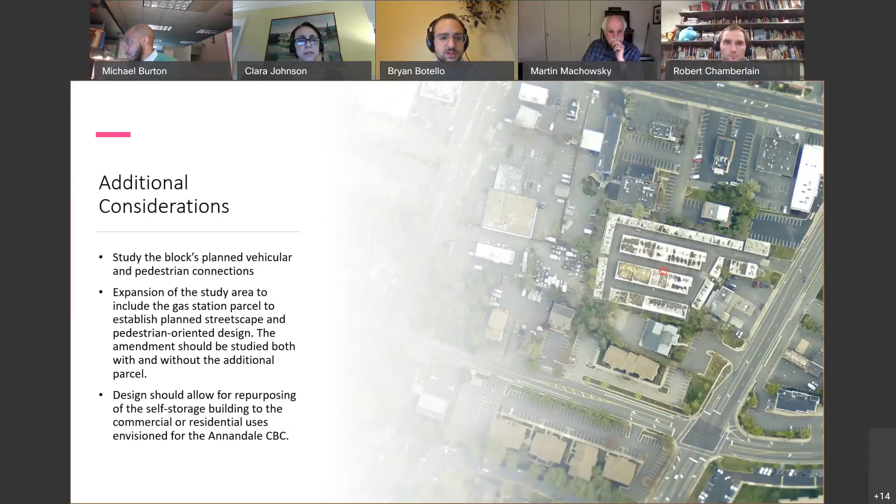So why would a plan amendment be needed to pursue this concept of an approximately 153,000 square foot storage facility? It's an issue of intensity and the mix of uses for the most part. Under the current zoning ordinance, the property owner would be allowed to build a new storage facility at this site, although it would be capped at a lower intensity, just about 40,000 square feet. But to develop at a higher intensity, the property would need to be rezoned, and therefore would need the support of comprehensive plan guidance.

The issue here is that the comprehensive plan and the zoning ordinance either discourage or don't allow storage facilities as a primary use at these higher intensities. There's also a question of the feasibility of the repurposing guidance. Our consideration up to this point has been that the same kind of barrier to having a single use at a high intensity exists with pursuing this repurposing guidance. It doesn't provide any additional uses and doesn't address the issue of only having a single use. We'll get into that a little more later.

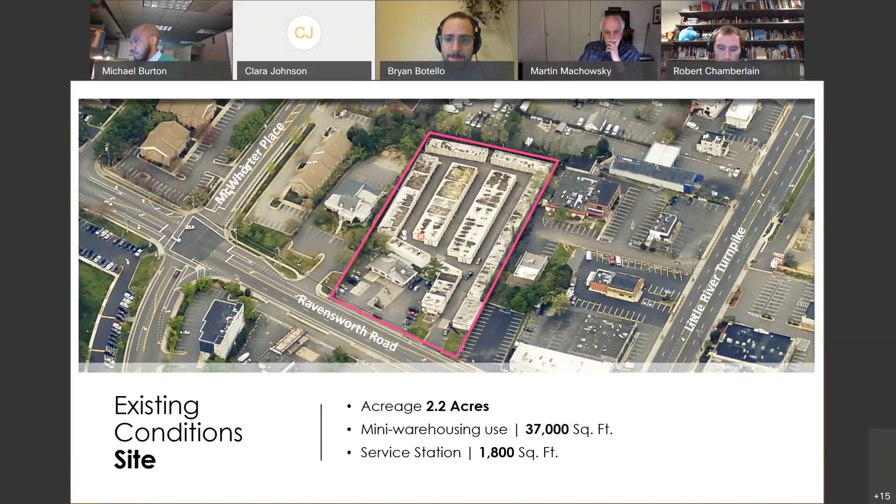Here it is, located in the context of the surrounding blocks. Behind the study area is the Messiah Presbyterian Church, and otherwise on the block it's surrounded by low-rise commercial development. At the very bottom left, at the intersection of Markham Street and McWhorter Place, that intersection is planned to be reconfigured, cutting out a section of the parcel at the very southwest corner of the block. The remaining land where you see the trees is planned for a new park. Immediately to the west and southwest of that intersection, townhomes have been approved for development.

The last thing I'll mention regarding existing conditions is that there is another existing public storage nearby, about 400 feet to the east of this one on John Marr Drive.

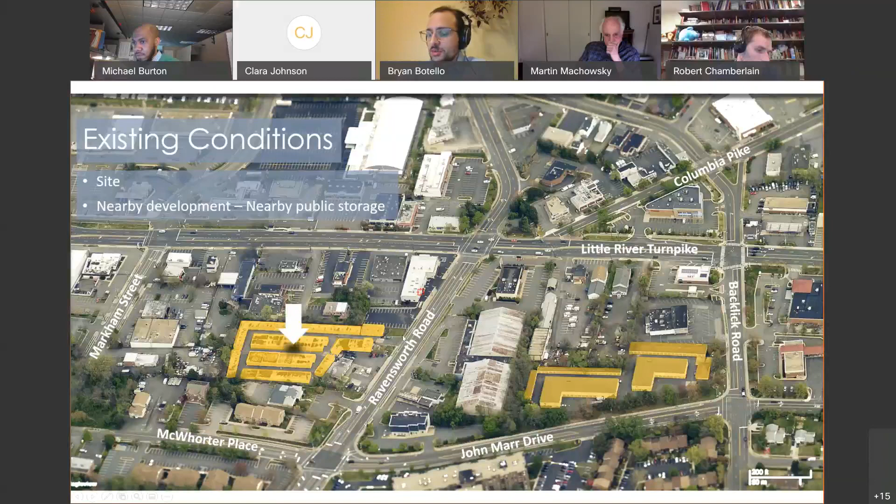Now that we've covered the scope of the planning study and the existing conditions, I'll summarize some of our considerations for this plan amendment study. Our evaluation is guided by two things. First is the concept's conformance with the existing comprehensive plan and the design guidelines.

Now, obviously this is a proposal for a plan amendment, so why should you care what's currently in the plan? Well, let's think back to last week. Remember there are different layers to the plan, and each layer is informed by the layer above it. So while we're considering a plan amendment for these particular parcels, what occurs here should conform to the Annandale CBC plan. That's really important to us. The Annandale community came together and produced this vision for how they'd like to see Annandale transform as a community business center, and we want to make sure that if the plan is amended, it stays true to that vision for a walkable and active community.

The second part of our evaluation is an assessment of impacts. For this plan amendment, our initial assumption had been that the impact assessment would be relatively simple, which is one of the reasons it was placed on the expedited track.

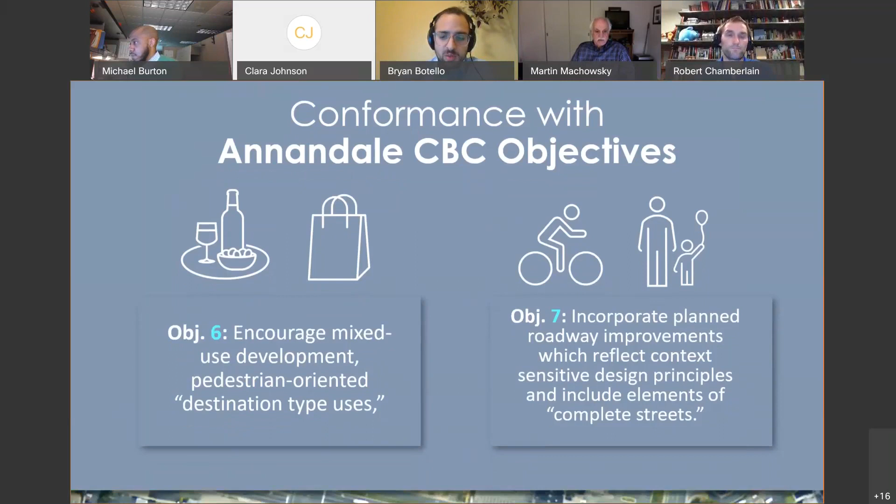These objectives should be achieved through the guidance found throughout the rest of the Annandale plan, some of which you'll remember from last time, and some of which we're going to dive into a little more detail on. So part of the guidance throughout the entire CBC relates to parcel consolidation.

The plan states that parcel consolidation is highly encouraged, again throughout the entire CBC, as a way to achieve the planning objectives. Any consolidation should be logical and of sufficient size to allow projects to function in a well-designed and efficient manner and address transportation needs, particularly access. And importantly, any unconsolidated parcels should be able to redevelop in conformance with the plan. That's an important consideration I want to stress to you all.

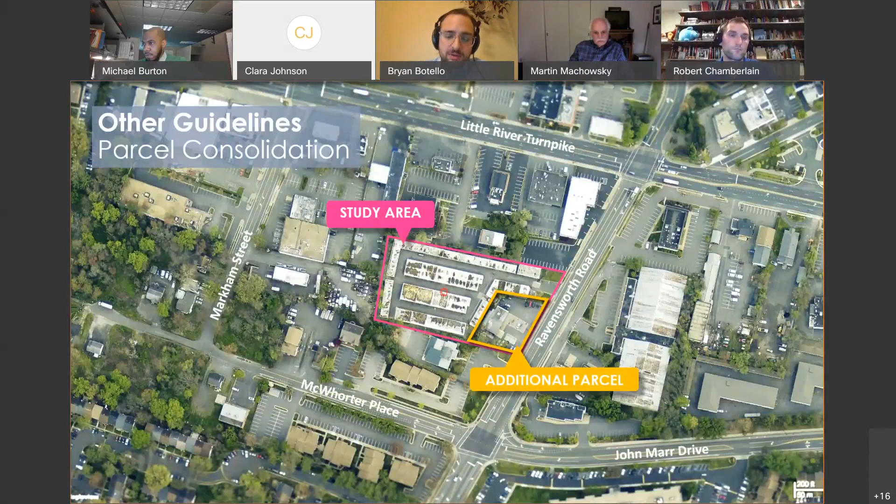Would the exclusion of the service station property from this planning effort prevent that property from achieving the goals of the plan on its own if it redeveloped at a later date? And does the idea that this plan amendment contemplates set a pattern that the rest of the block then has to conform to?

As we covered last week, Annandale's form-based plan contains guidance for achieving those objectives that I mentioned a moment ago. The form-based plan contains four elements: a maximum recommended building height, building typology, recommendations on general and specific land uses, and urban design guidelines.

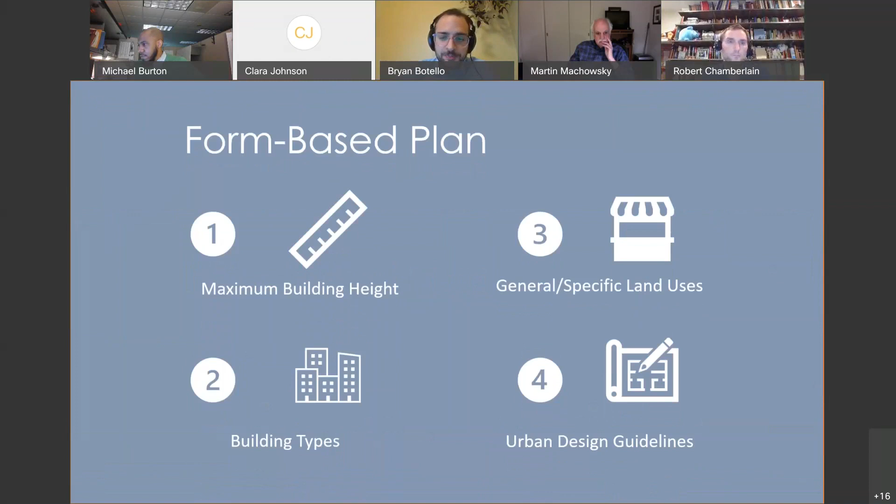So we don't have to spend a lot of time on this. I would just note for your information that the buildings are envisioned to be highest in general in the center of the CBC, and then they tend down in height towards the neighboring residential communities.

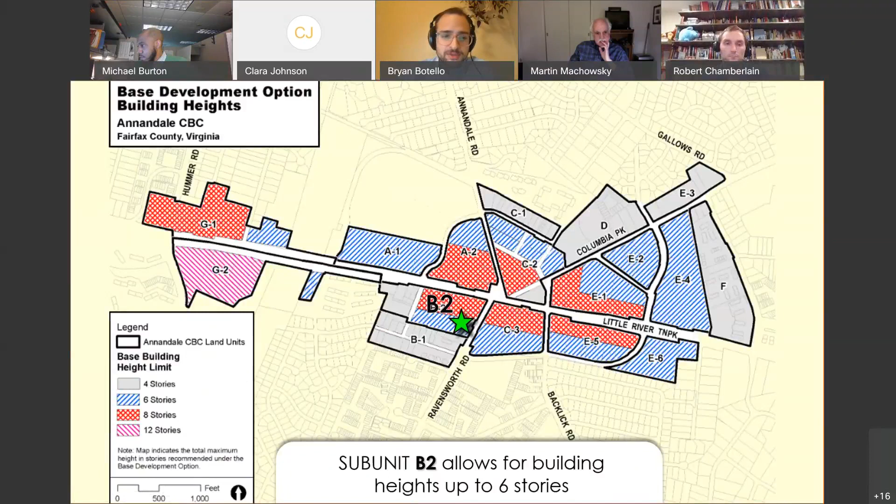And then again, you're all familiar with this graphic from last week. As you saw from the previous slide, this study area is planned for buildings up to 6 stories in height, which falls into the mid-rise commercial mixed use category seen in the middle here.

There's a brief description here, which states that these are medium scale buildings with single or multiple users. They typically have surface parking behind the building or some limited garage parking, which may be in a separate structure. And it also notes that some consolidation may be needed for buildings of this scale.

Finally, on the far right, we have the design standards, which state that buildings should be oriented toward the street, that the main entrance should face the street, and that the ground floor should be commercial use or live work. And once again, the authorized plan amendment does not meet these goals. It does not contemplate ground floor commercial or live work uses, and without consolidating, the building does not face the street.

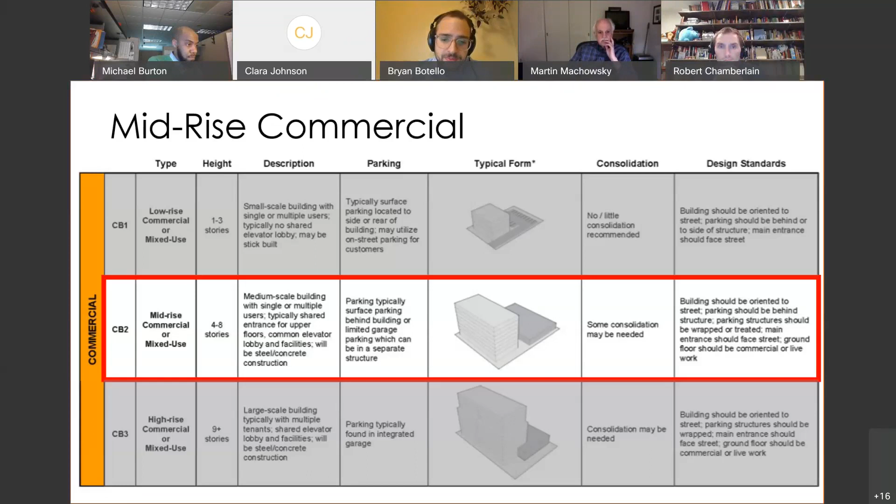And then again, the third part of the form-based plan is the land use guidance. As I mentioned last week, throughout the entire CBC, storage uses are specifically discouraged by the plan. However, it does leave an opening for their development. It states that if they are considered, they should be a component of a mixed-use development and not the primary use. The reason behind that is that storage facilities, as I mentioned previously, are considered an industrial, auto-oriented use that's generally incompatible with the vision for a lively, pedestrian-oriented Annandale.

So now we have the specific recommendations for subunit B2. You can see the major recommendations here on the right, but I will summarize them for you. It's planned for commercial or mixed-use development, a point I think I've already covered pretty thoroughly for the rest of the CBC. New streets and pedestrian corridors should be utilized to create separate blocks within the subunit.

My colleague Farouk will address that in more detail a little later. Communal surface or structured parking should be considered to address parking needs, and parcel consolidation for redevelopment is highly recommended. Another point I've already covered, but as you can see again from this parcel map, without consolidation, constructing a building oriented towards the road and providing the streetscape expected in Annandale is difficult, and it may present problems for redevelopment of the service station as well, as redevelopment for it may be envisioned later down the road.

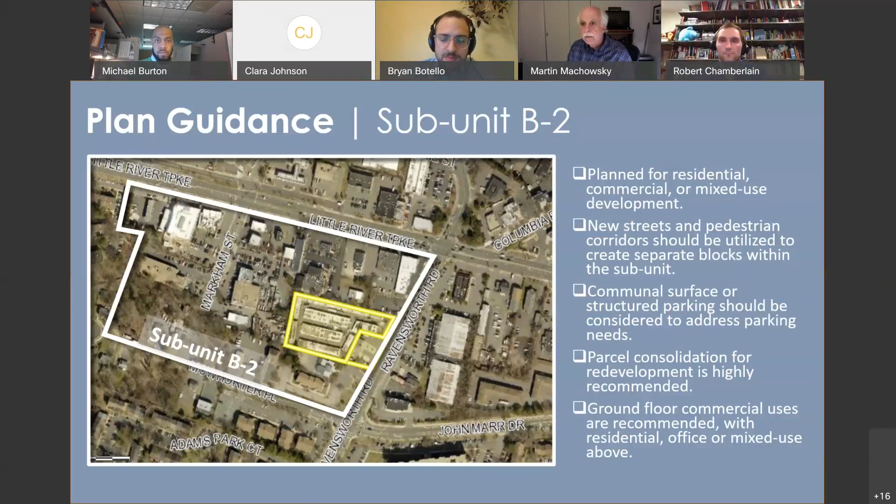And with that, I will turn it over to my colleague Laura Baker from the Community Revitalization section to talk about the urban design guidelines and how we're thinking about them in relation to this idea of a new expanded storage facility.

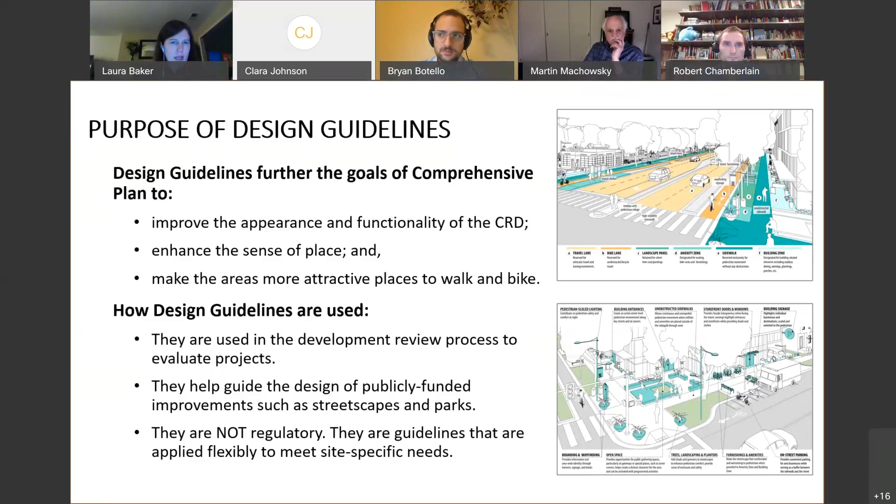Thank you. In Annandale, or is it now turned over to me? Sorry. No, I've got it. Should be on the next slide now.

Okay, cool. Thank you. In Annandale, we've had urban design guidelines that were created after the comprehensive plan vision was updated in 2010. In the county, the way we handle urban design guidance is broken into 2 volumes. Volume 1 applies to all revitalization areas and districts in the county, of which Annandale is one. Volume 1 really touches on broader urban design things like streetscape design, proper intersection design, landscaping, building placement, things that could be applicable no matter what commercial revitalization district or area you're in. We also have volume 2, which is more district specific. In 2011, design guidance was created for Annandale, which has been in use since that time.

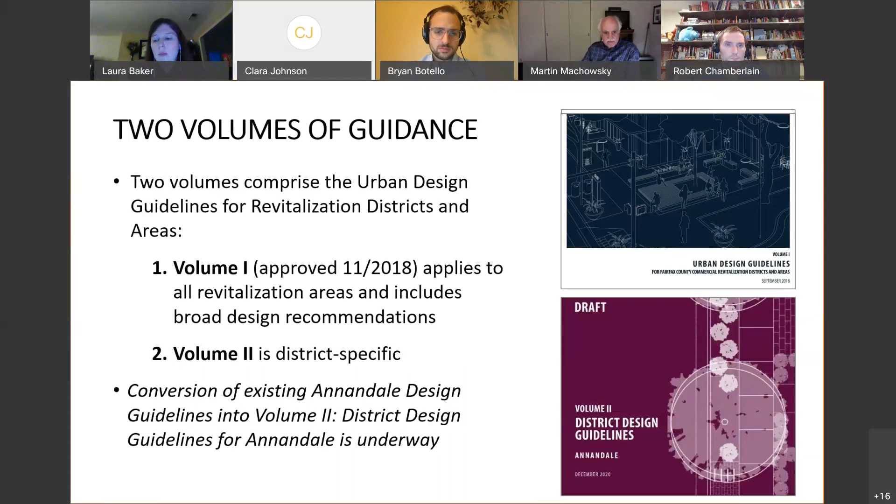Most recently, within the last couple of months, though it's been longer than that, we went out to the community to try to gather some feedback on an update to the Annandale district specific guidance. Volume 2 typically provides some of those more character defining aspects of a place, like elements related to furniture or what the streetscape's going to look like, or things specific to a place, which tell you that you're in Annandale versus that you're in Richmond Highway. So we've been working on that for the last couple of months and have been converting and updating that 2011 guidance to these updated standards.

Touching on the public realm aspect, we are always looking for projects to achieve that future vision for the streetscape, right, anything between the building and its relationship with the street to the travel lanes. So you can see here on the left, Ravensworth Road as it exists today — obviously not a whole lot of space for people to enjoy it. With the vision for Annandale in the future, we're looking to transform it.

We're looking to have a building zone directly adjacent to the building, a sidewalk so people can move through the area, a landscape panel with street trees, landscaping, and amenity zones with elements like furniture, lighting, benches, and trash cans. And then of course you have the roadway, which transportation will talk about more. This is an extremely important aspect.

One of the challenges with the proposal, particularly if it's standalone within just one parcel versus both parcels, is that the ability to achieve that vision is significantly constrained by the existing frontage that the main property has.

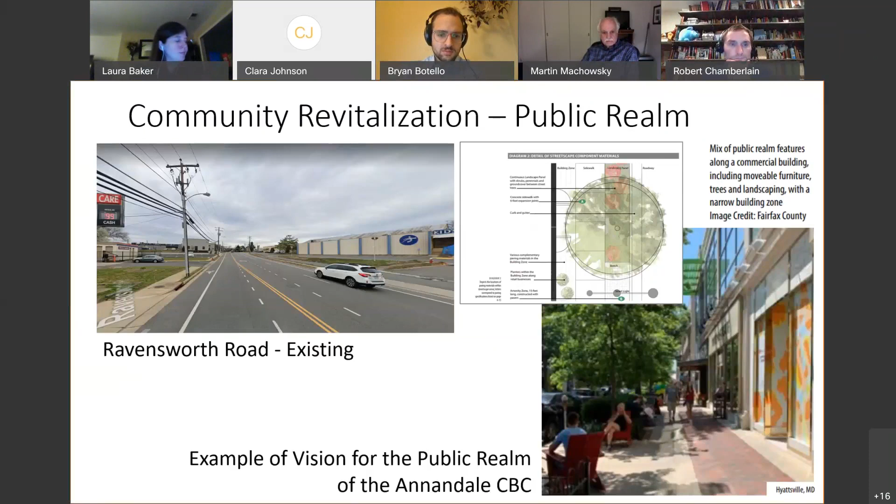Other things that are really important when we look at urban design are all the architecture elements: massing, modulation, fenestration, articulation — things that really matter to how a building looks, how it feels, and how it establishes a relationship not only with the street but with its neighbors. Considering the new height of this building and its visibility, these details are going to be really important since it would be a new development. Given the use being proposed, we're going to be very interested in things like window treatments and screening of equipment and things like that.

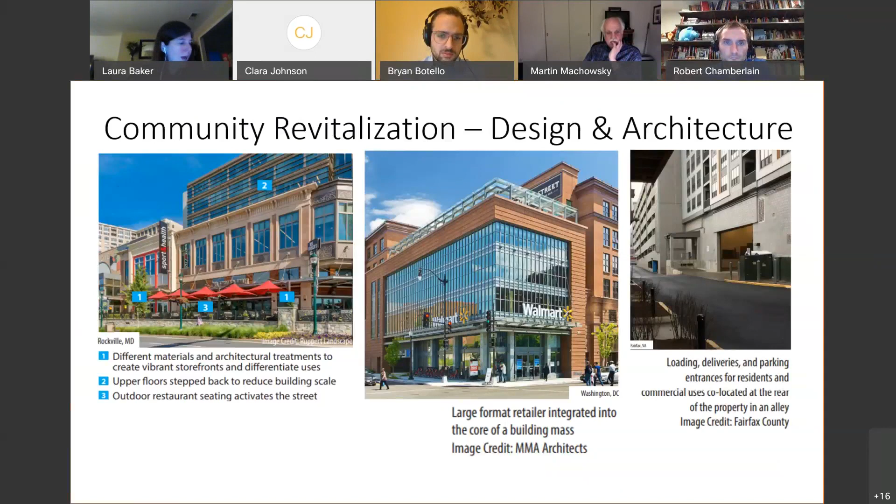Final slide, if you don't mind, Brian.

Going back to some of the things that Brian was talking about before in terms of what the comprehensive plan is trying to accomplish, the relationship of the building to the street and ground floor uses is extremely significant. Activation can be very difficult without having that relationship in place to help create the vibrancy we're looking for in Annandale, without providing things that are of visual interest and help enliven that space.

So we are a little bit concerned when it comes to storage use as a standalone use, because as Brian said before, storage uses tend not to mimic the things we're looking for in terms of being people-centered, something that encourages you to bump into your neighbor. They tend to have more minimal staffing, they're very vehicular oriented, and oriented about storing physical property versus providing a space for people to interact. That is also a concern when you think about the vibrancy we're trying to accomplish in Annandale. And that is all I'm going to share on urban design.

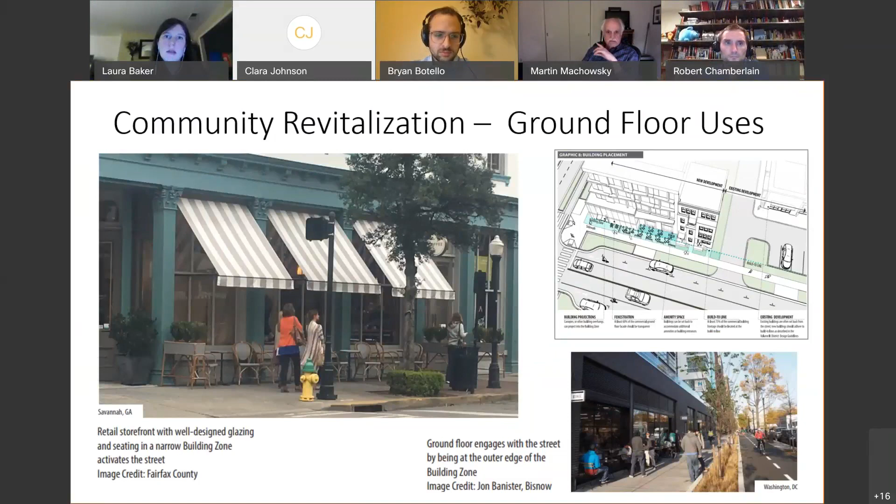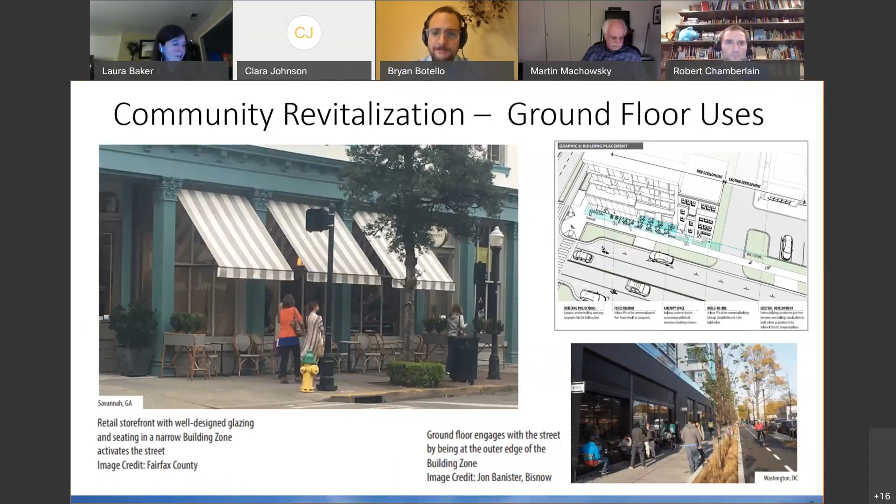After going over the form-based guidance and design guidelines, I wanted to show you a few examples of storage facilities in the area that at least in part begin to address some of the guidance in the Annandale plan, both in the plan itself and in the urban design guidelines. We're not necessarily saying we want this exactly, but there are elements here that begin to address the considerations we've had.

This is an example from the McLean CBC, a storage facility constructed in 2012 that includes an office component. As you can see, the building is oriented toward the street and contains some streetscape amenities like a landscape panel.

Here's another example in the region, in Arlington, constructed in 1995, approximately 100,000 square feet. It's used solely as self-storage, but it does exemplify some of the site and building design and pedestrian realm recommendations Laura just spoke about. It's located close to the sidewalk and oriented towards the street, helping create a more pedestrian-friendly environment.

Some of the uses that would be discouraged and are less friendly to pedestrians are located off the main part of the building. Here's another example in Arlington, again a single use, but a good depiction of how orienting the building toward the street creates a more comfortable environment for pedestrians.

This is an example of a mixed-use development from Toronto that incorporates self-storage. The ground floor consists of retail, the second floor is office space, and the exterior of the upper floors are wrapped with residential, while the interior of the building is self-storage. This example is larger in scale than what we're contemplating here, but it shows one possible idea of how you could incorporate self-storage into a mixed-use development that's in keeping with the plan recommendations we covered earlier.

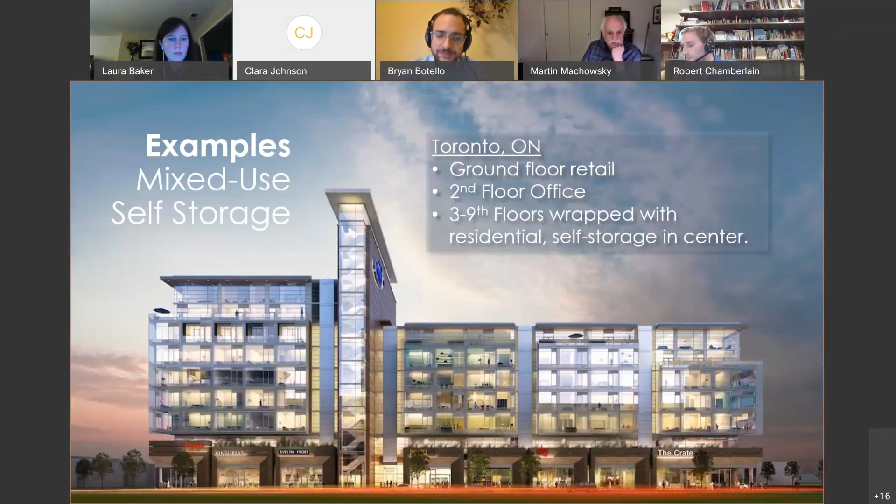Here's another example of a mixed-use concept. The bottom floor consists of ground floor retail, with multifamily residential units above, and storage units in the center.

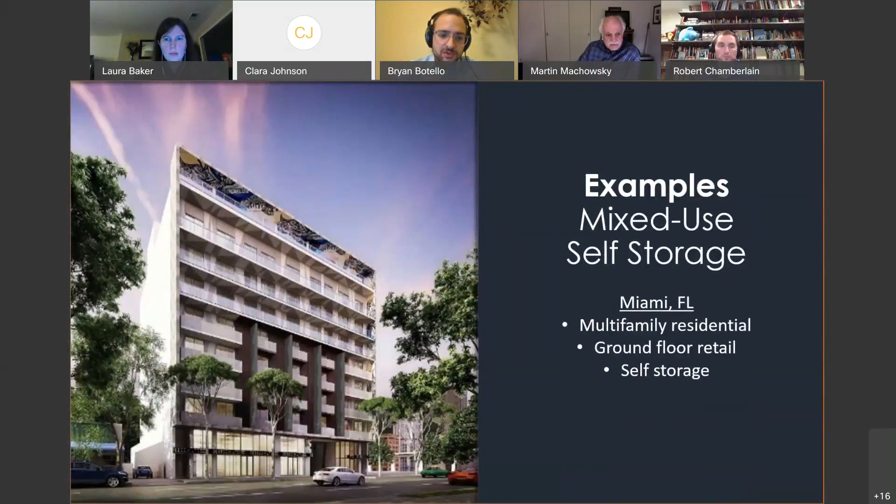With that, I'd like to turn it over to my colleague Farouk from the County Department of Transportation. He'll cover some of the existing conditions for transportation, discuss in more detail some of the public realm and urban design recommendations as they relate to the transportation network, and also discuss some of the projected impacts from our transportation impact analysis.

So Farouk, if you're good to go, I can proceed to the slides for you. I think so, yes, thank you Brian. Hello everyone, this is Faruk Hesenjan from the Fairfax County Department of Transportation.

My presentation will cover three parts of transportation analysis. One is the comparison of the existing conditions of Ravensworth Road as opposed to what is recommended in the urban design guidelines in terms of right-of-way. The second part will be about internal connections and right-of-way requirements within the subunit. The third will be about trip generation in different scenarios in our nomination.

To start, Ravensworth Road is the only access that the public storage parcel currently has. What we currently have is a right-of-way of 65 to 85 feet in width, consisting of 2 northbound travel lanes, 1 southbound travel lane, and both directions with a dedicated left turn at the ends - to Little River Turnpike in the north and John Marr Drive in the south. Both directions have a 5-foot on-road bike lane, 4 to 5 feet of sidewalk, plus 2-foot utility panels.

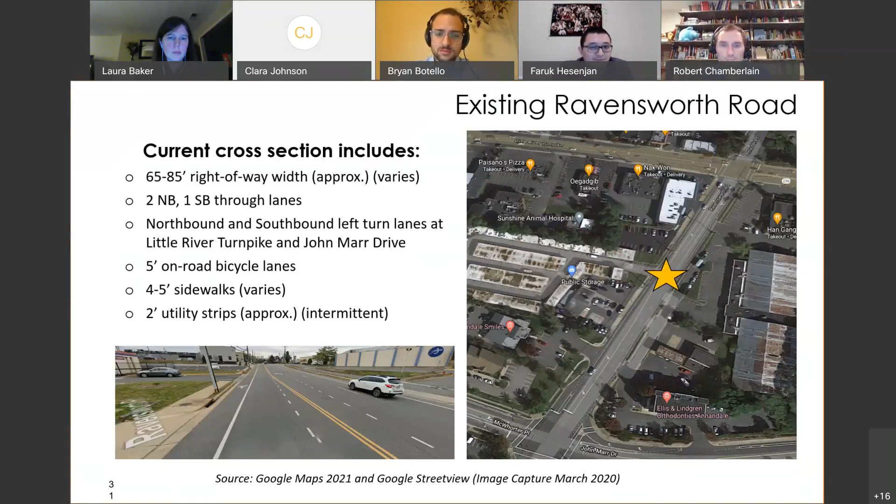And it does have a wider sidewalk of 6 feet, as opposed to 4 to 5 feet that Ravensworth Road has currently, and a wider utility plus landscaping panel of 5 feet. So especially with the gas station property taken into account, to convert this property into a more active use, I think these are the elements that we need to take into account.

In addition to the right-of-ways, there are building zones recommended outside of the right-of-ways that can actively contribute to the future use of this corridor. That building zone can consist of storefronts, outdoor dining options, etc. This can be a very important element in contributing to the active use of Ravensworth Road. Brian, next slide please.

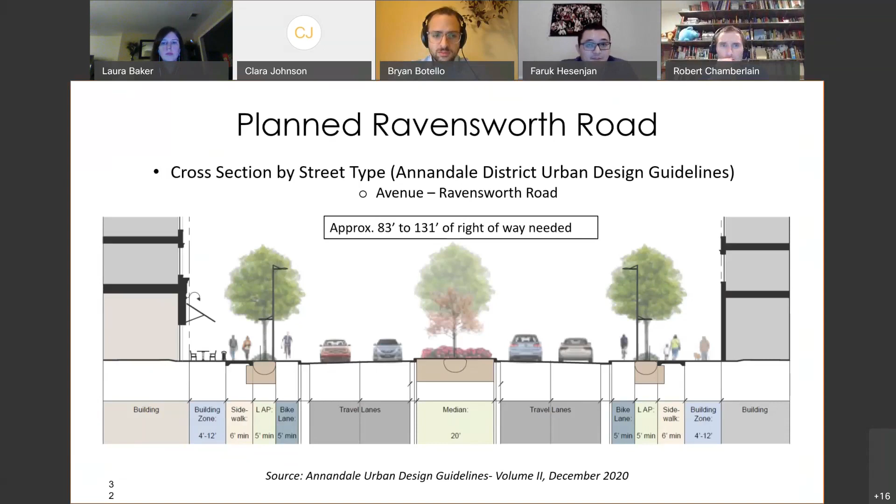So as to the second part of the presentation, the potential multimodal connection within the subunit - as you can see here, our subunit is surrounded by Little River Turnpike in the north, McWhorter Place in the south, Markham Street to the west, and Ravensworth Road in the east.

And the potential internal connection can be created based on a grid, based on the northern and western borders of our public storage parcel. I think that's one fortunate element here. Currently we have one driveway between parcel 13 and 15 that can actually be a potential future north-south connection point for the public storage site.

However, I should mention that currently this is a private driveway with an easement and a deed related to it, dated back to 1946. So that will be one of the elements that we need to consider. But this may not be the only connection option we have for the north-south connection.

There are different options, and especially this north-south connection can contribute to lead to the multimodal corridors in the north, with some bus stations currently along the Little River Turnpike.

But in terms of the function of the internal connection, it may not be heavily vehicular because, as my colleague Tom Burke presented in the last presentation, the streets surrounding the subunit are actually sufficient to provide the vehicular connection to the Little River Turnpike or the Ravensworth Road, which are the major connection points of the subunit.

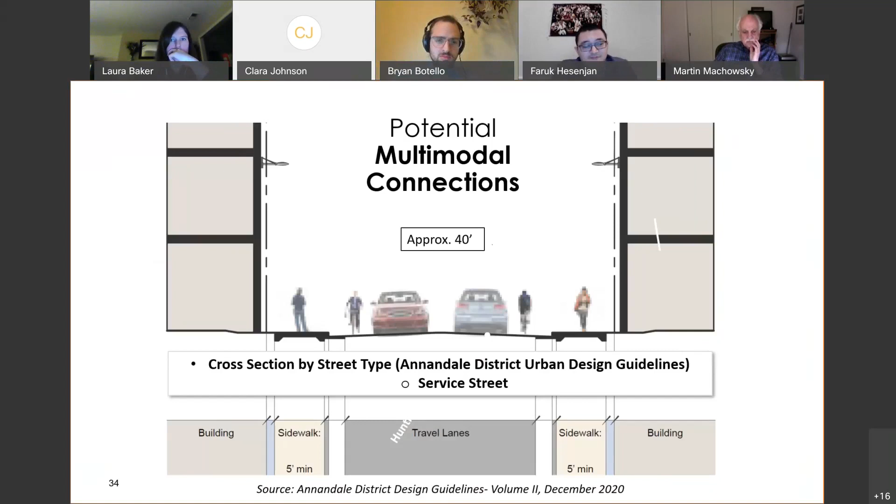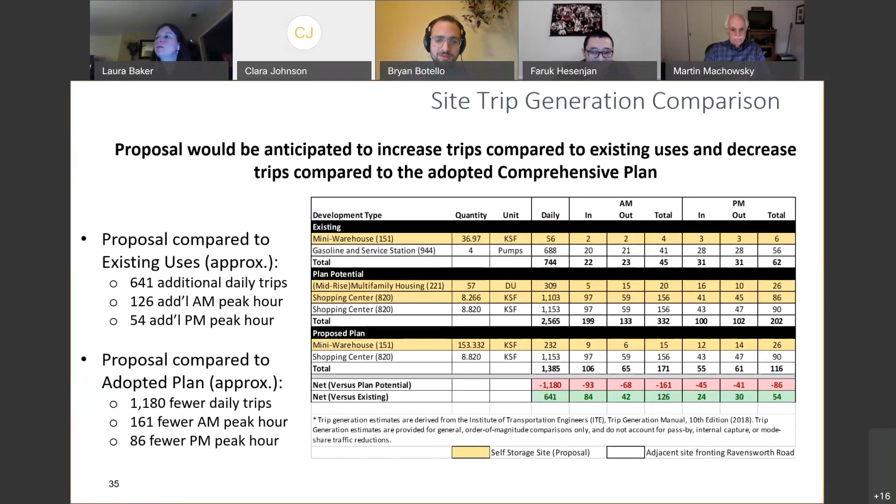So that's actually a great segue, because now we can shift from talking about the anticipated transportation impacts to addressing the other analyses that the county conducted. So just a general note, and you hinted at this, Faruk, when we look at the expected impacts of a plan amendment, we generally focus more on comparing the current plan to the proposed plan, and not necessarily the current development to the proposed development.

For parks and schools, there are no expected impacts because the nomination doesn't include a change in the planned intensity of residential or office use. So there are no expected impacts in terms of student generation or park usage here.

Wastewater, I noted that there is adequate capacity and had no further comment. However, there were improvements identified in terms of the urban forestry and stormwater, and these are really tied together.

So the site is nearly 100% impervious. The Annandale CBC plan notes that the area's natural environment has changed due to development. There's little vegetation remaining within the CBC, and this in turn affects the health of Accotink Creek and the Cameron Run watersheds, which Annandale runs into.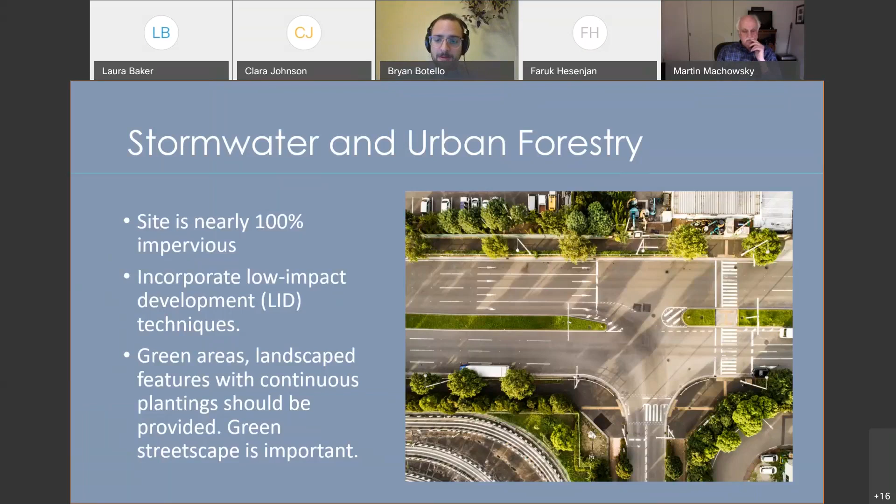I'd like to leave you with a few concluding points. First, that the plan highly encourages mixed use and pedestrian-oriented uses. Second, that there are great hurdles to implementing the urban design guidelines without parcel consolidation. These are really two of the primary considerations we'll take into account when coming up with our recommendations, and we encourage you to take those into account as well.

Finally, before I turn it over to you all for discussion or questions, I'd like to leave you with one question of my own: can this idea of a standalone storage facility be implemented in a way that realizes the vision for the Annandale CBC and sets a pattern for future development of a lively pedestrian-oriented community? So with that, we'll open for questions or any comments folks have, or if there's any discussion.

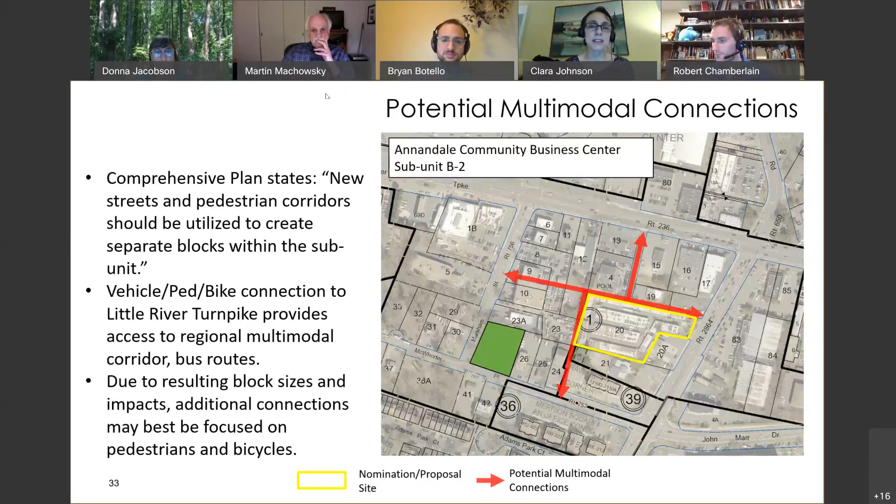This is Clara Johnson from DPD. I would agree with Donna's observation. I think it would be challenging to permit left turns. This wouldn't be expected, this would be strictly for local trips visiting those businesses, just another alternative for moving around that space, and not just for cars but especially for people and bicycles. I think that's probably a good observation, that it would be right-in, right-out circumstances.

Other task force members with questions?

I have a question. I'm just curious, the previous sport and health place, whatever the kid thing is called, that's defunct now. What is that currently zoned for, and what's going to happen to that?

I can check the zoning on that. I believe, off the top of my head, that's zoned C8, the same as this parcel, but I can confirm that. I'm not aware of any immediate plans to redevelop it.

So the closest residential to that would be Ravensworth Towers and the new townhouse community that's planned off of Markham at McWhorter.

Robert? And I'm sorry, the storage unit existing could, without zoning changes, build to four stories?

So currently it's zoned C8, which would allow them to develop at a 0.5 FAR, which ends up being around 40,000 square feet, a little less than that—another 3,000 more than what they have. Okay.

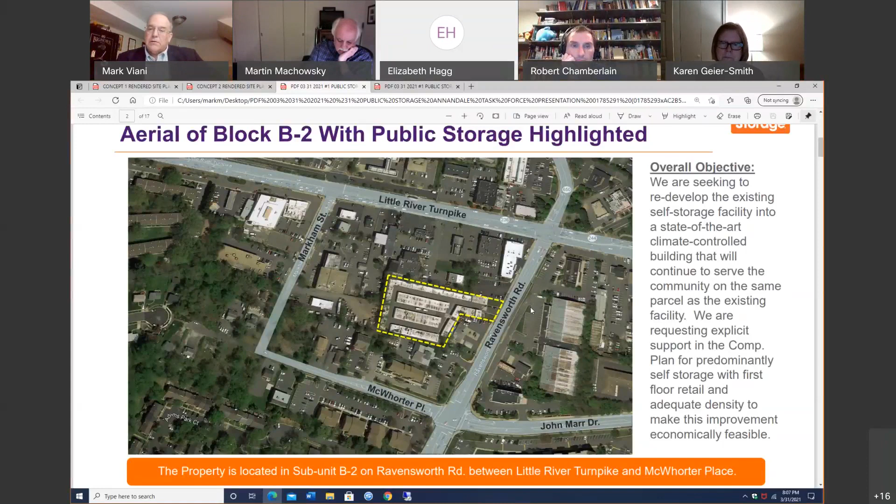As we talked about, it's kind of the same thing. In the center of the block we're at a low point right here. The existing improvements are old, 40-year-old buildings. We could just redevelop those by right and keep it about where it is, maybe add a little more. But that doesn't really help the community, and it doesn't really help the redevelopment of the area. So we're trying to deliver something we think is much more reflective of what the community is going to need in the future.

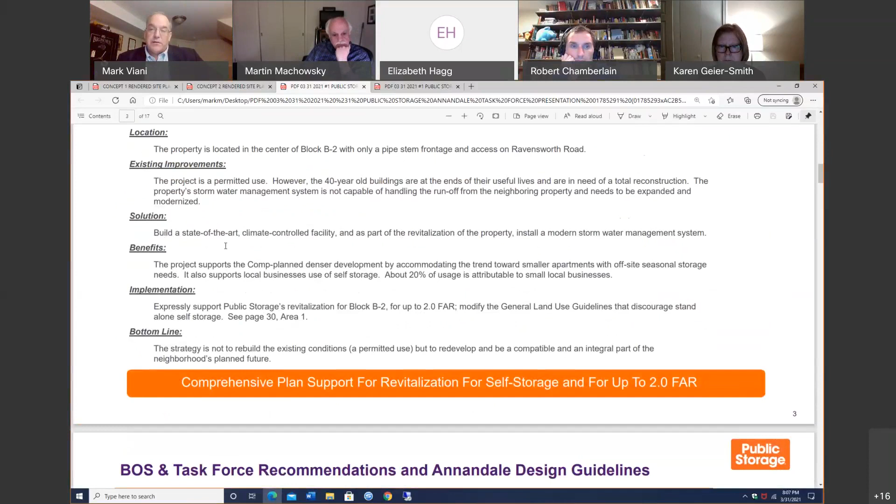The staff report talked about what the recommendations were coming out of here: study the subunits, plan streets and guidelines, pedestrian corridors, and should allow for the conversion of commercial to retail or residential. And we do that — we'll explain that when we start discussing design. We're planning for an entire bank of conversion to first floor commercial when that opportunity comes along.

Plans for expansion with and without the gas station property. The first step we took in this process was to approach the gas station property. It had been purchased about a year and a half beforehand by another company, and they'd put quite a bit of money into fixing it up, so there just wasn't interest in redeveloping. That's what they do — you have to respect that. So they said, we're not interested in redeveloping the property. We just bought it, we're planning on keeping it.

Then some of the other things we had to consider: the eventual widening of Ravensworth. We saw in the staff report there's ultimately a possible right of way of up to 83 to 101 feet per the Annandale design guidelines. How would that impact the frontage of our property? So our designs are trying to incorporate that as well.

Then when we looked at the internal road network, we talked about vehicular connections. We looked at the same 40-foot wide service road dimensions and how to lay that in. So when you saw the staff plan with that grid network, we can accommodate that, or we can accommodate something that varies from that as the rest of the block builds out. But we're providing the basic infrastructure for that.

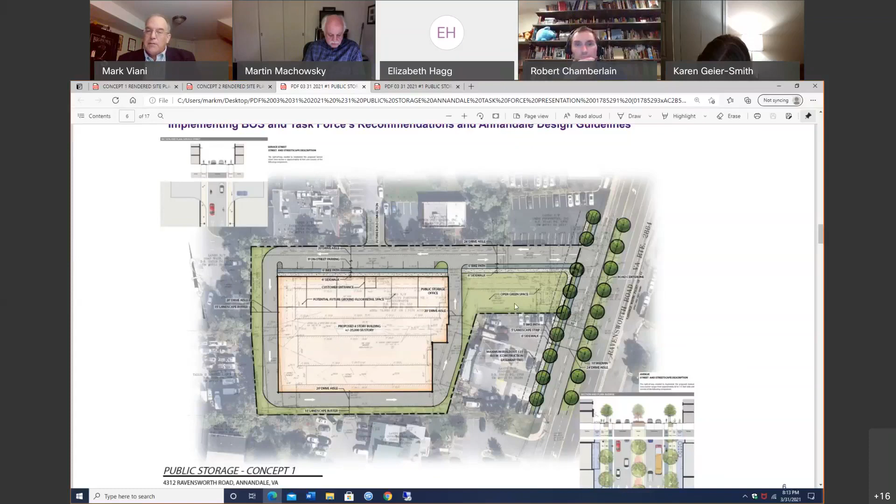Well, you're already at this point taking out gas pumps. You may probably be taking out more during highway construction. Maybe there's a way for us to work together with those folks to give them part of this land to stay there, if there's an interest by the community to do that. Or maybe the opportunity is what we're looking to do for option 2.

This is our future street grid we're talking about. And that's where we say, okay, maybe if the county ends up having to take all that for part of the roadway widening and there's not much left, the county keeps it. We dedicate this land right here. You have another urban park, maybe a dog park, maybe some sitting area, maybe just a commons area. But you have that right next to a new future public street. You have a public street right there.

And you've got the building here that has met what the community wants in terms of architectural design guidelines, provides the street frontage, provides the bike lanes, the pedestrian lanes, the vehicle lanes, the on-street parking in the configuration called for, and the first floor activation on that right of way. So these are some of the thoughts we're camping on here.

And again, asking to be given the chance to work with the community to find this as a solution that can maybe work long-term for the benefit of Annandale and for this block and begin the first green shoots of development. This is not 100% self-storage. This is a mixed-use project, a mixed-use project with potential for commercial on the first floor. It's got office. Yes, it is predominantly a self-storage.

But right now, the building is 100% self-storage. So it's just a question of, do we want to keep what we have right now? Admittedly, we would still go redevelop it to something nicer than what we have now, but just kind of by right, or have it in a way that provides the infrastructure to allow future redevelopment of the other area and allow for investment, new development, and roadway and vehicular connections and pedestrian connections that would maybe aid the community as it builds out.

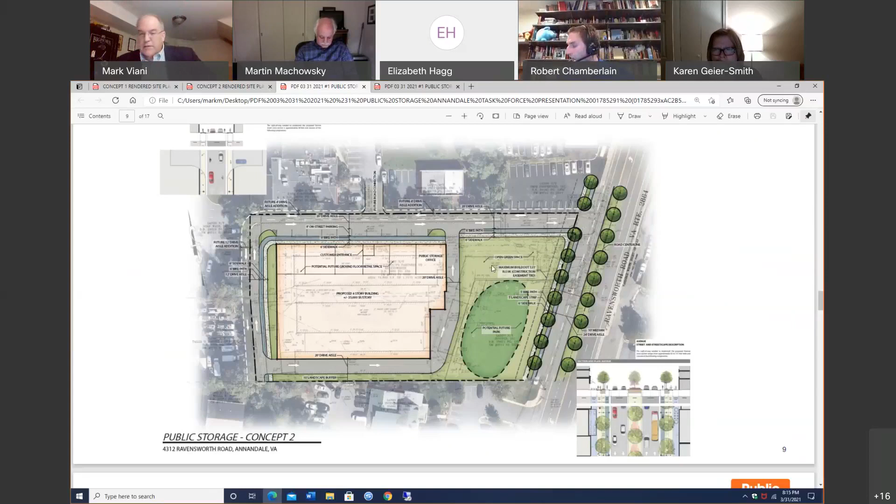So that was basically what we wanted to talk about here. And with that, thank you very much for your time. I think I've gone through 10 minutes, so I'm going to be quiet and take your comments.